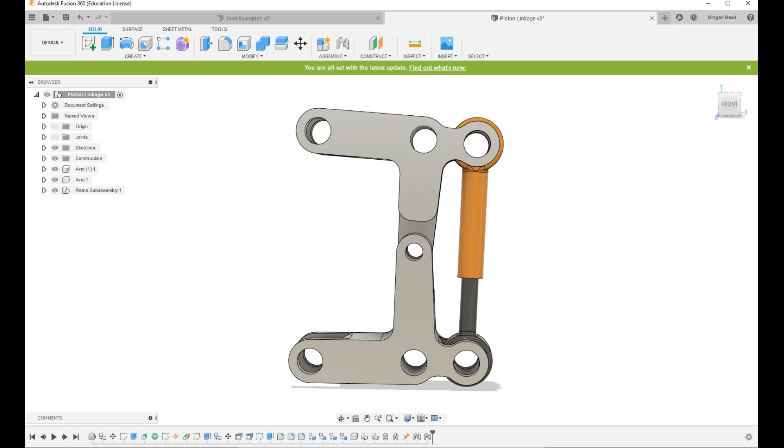Okay, today we are going to simply learn about a feature that Fusion has called joints. Here's what joints do in a nutshell. So after you get something modeled, you can actually add joints to it to make it move like it would in real life. So you can add constraints to those joints so it doesn't go too far. I think there's like 6 different kinds of joints. So this is eventually what you're going to work up to, but let's take a look at what these joints

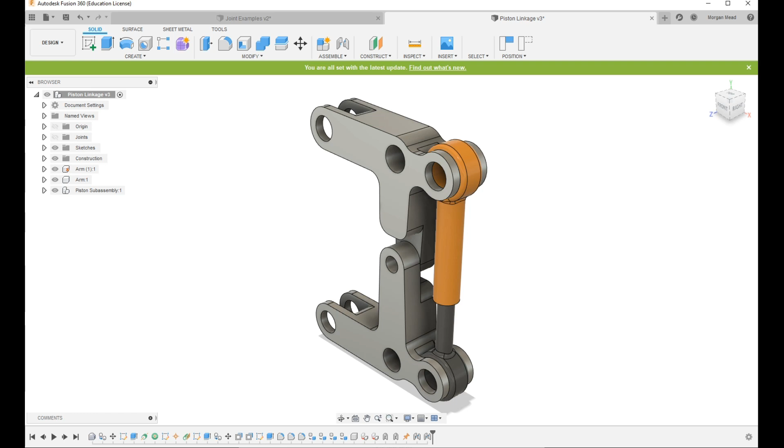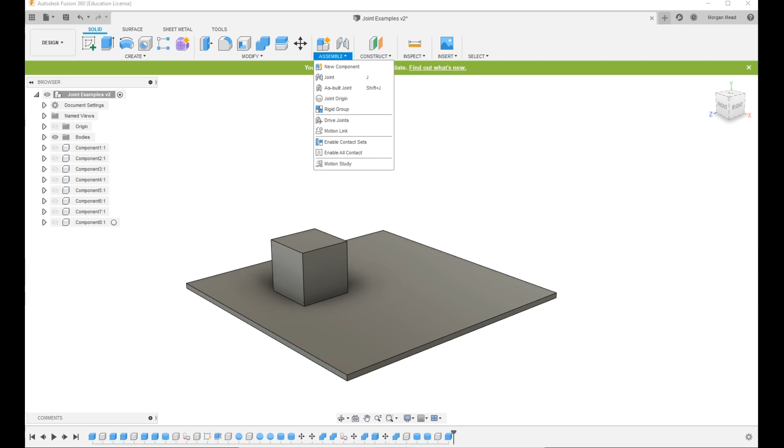are real quick. All right, so the joints are up in this menu under assemble and then joint. There's actually 2 kinds that you can do. You can do joint or as built joint. Right now we're just going to look at joint. The big difference is as built means that the pieces are already in place where they go. Joint will actually move them into place and then put a joint in between them.

So let's go ahead and go to joint, and it's going to ask you for 2 components to join together. Right now I have 2 bodies and they're in the same component. So if I try to select them, it's only going to select them together. So I wanted to make you aware of this first. This is the reason that we got you in the habit of making new components for the Fusion Cubes project, because everything has to be in new components in order to do joints and really anything else in Fusion. It just likes you to have different parts in different components.

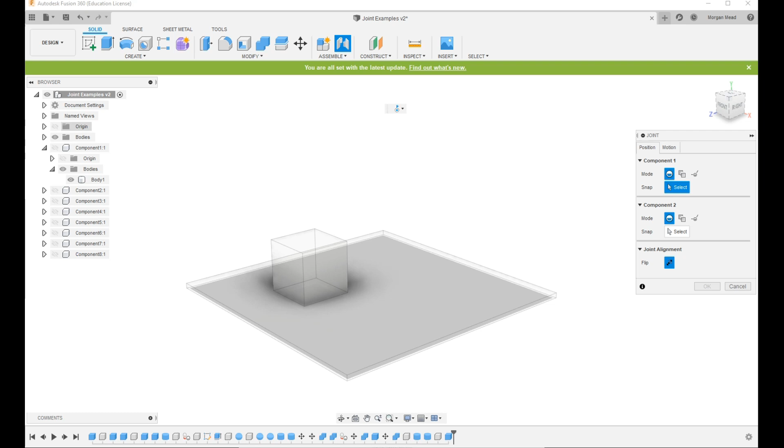So see, each component has its own little folder full of bodies. But if I have the bodies next to each other in the same bodies folder, that means they're in the same component, and I can't really do much with that. So I'm going to go ahead and hide that cube because that was just my example. And let's show this one. So now I can take the main component up here, which only has my floor in it. And that's going to be my first thing. Let's see if it lets me. Let's go back into this. Yeah, it's not going to let me do that one either. So I'll just show 2 components then.

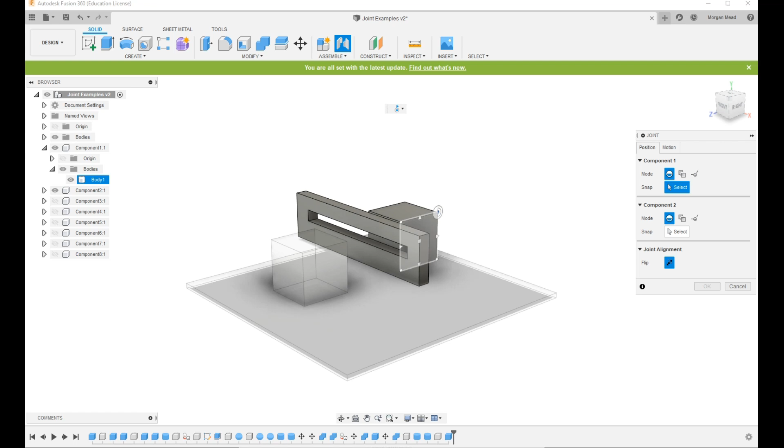So here's component 1. It's going to ask me not only to select the component, but also to select a pivot point or a snap point where the joint is going to kind of land. When we do the first kind, which is rigid, it really doesn't matter where that pivot goes or that joint origin. So I'll just show you what that looks like. That little circle with the half moon thing, that's the joint origin. It's asking you to place one of those whenever you click.

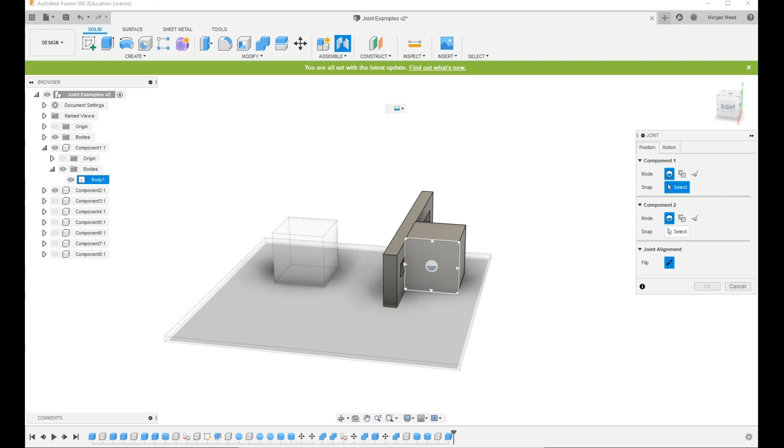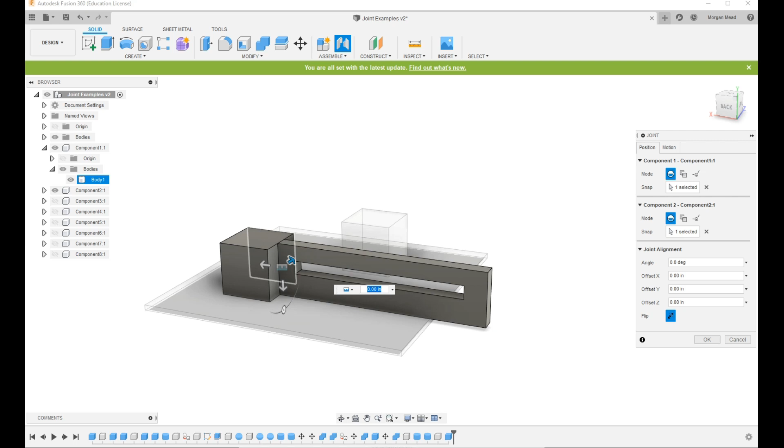So I'm just going to click here, and then I'm going to click on my second component. See, it's got this one selected now. So now it moved on to component 2. So it's asking, what am I joining that thing to with a joint? And I'm just going to click on that one. And it's going to take those 2 joint origins and smash them together. So I picked the center of that face on the box and the center of this face on this weird shape. And it moved them because I picked joint. If I would have picked as built joint, it would have kept them in place.

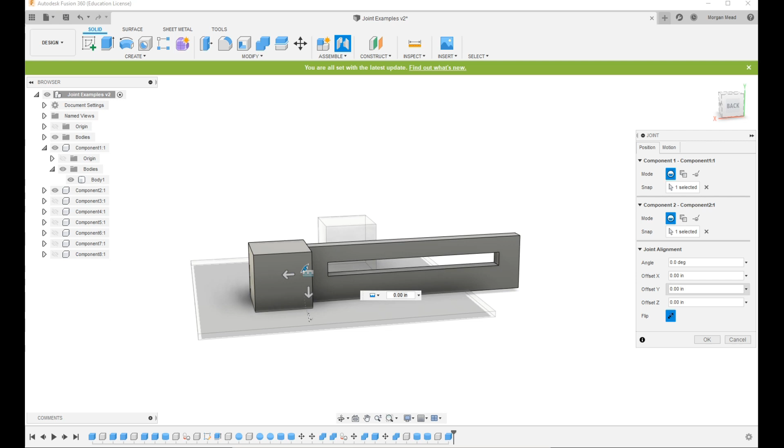So I would have been expected to have this already moved into this spot if that's where I actually wanted it. Okay, then I have options of flipping it. So if I flip this, it's actually going to put the cube inside of this thing, which is undesirable. And I can offset it or rotate things, kind of add some fine tuning to that. I'm just going to hit OK. So now let's get this guy out of here again. Now if I try to move this box, these 2 move together because they are joined with a rigid joint. That's basically like gluing the pieces together.

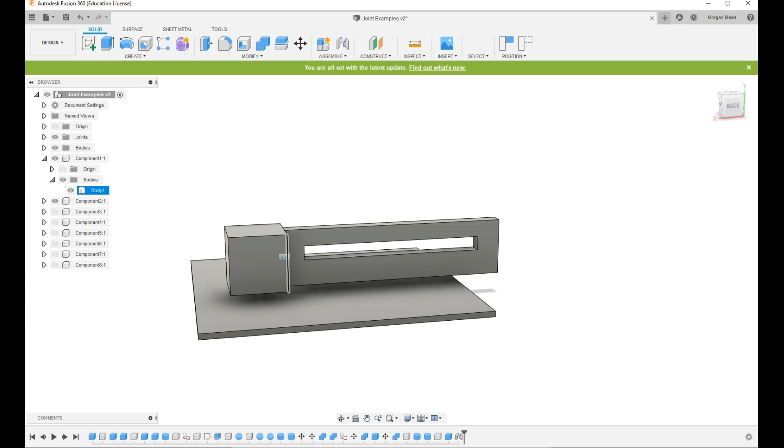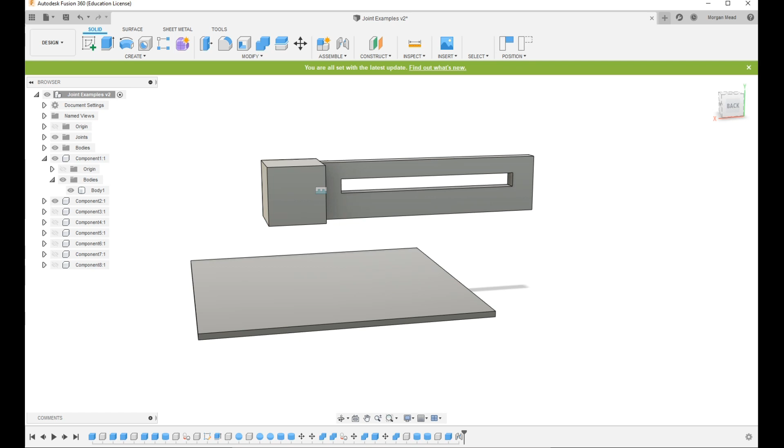Now you'll notice too that whenever I move something, this little icon appears up here. It's asking me, do I want to capture the position or do I want to revert? If I capture the position, then my boxes or my objects, whatever I have, are going to stay put right here. And then this icon is going to disappear. If I hit the other button, it's actually going to go back to where it used to be.

So the reason they have this is because you can sit here and test. You can test the movements of things and say, oh yeah, this is moving the way I want it to. And then you can just revert it back to kind of the standard position of your object. So like that piston thing that I just showed you a minute ago in the other project, I would test the movement to see if everything is working, and then I would revert it back to the position, because I don't want things in really weird positions when I'm modeling.

Okay, so that's a rigid joint. Notice too, whenever I put a joint like that, I can select it right there by clicking on it. I can also go down here and select it. Either way, I can go to edit joint and change a few things if I need to.

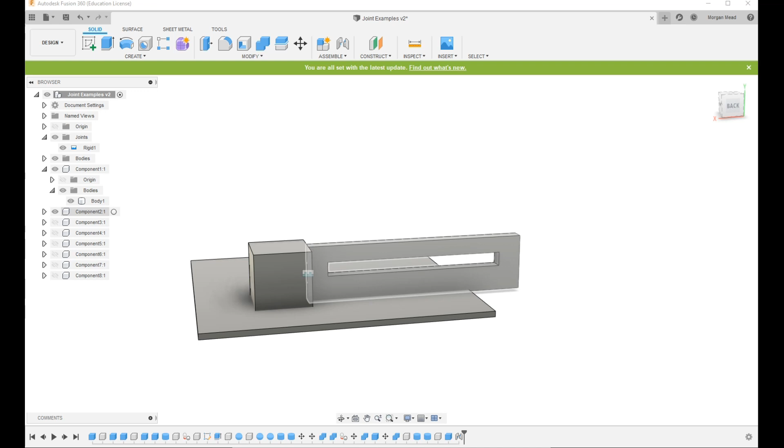It also appears right here in your brand new joints folder. So as long as I have the top component active like this, my joints folder is going to go up here. If I had a different component active, the joints folder would go inside that component. Let's keep all of our joints up here. So if I wanted to get rid of that now, I can just right click and delete it. And of course, everything goes back to the way it used to be.

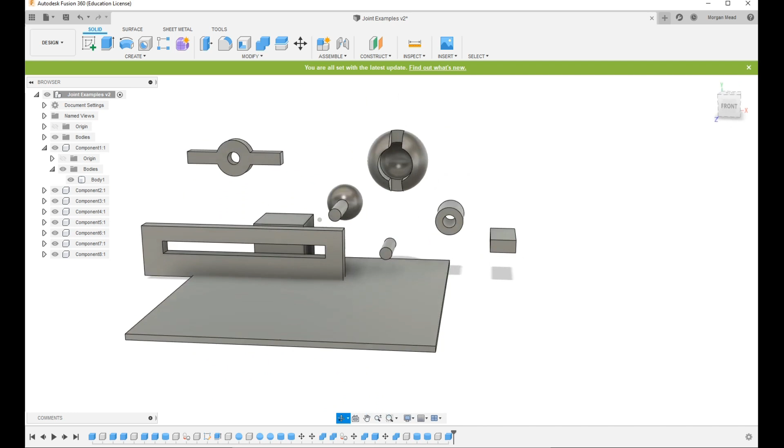Okay, so let's show a few things here. I modeled out some objects just to show you what a couple of these things do. Let's move this little guy out the way. You go right there now. Okay. So let's see what these different joints are. So I'm going to go to joint, and I get this little drop down that appears kind of in the middle of nowhere.

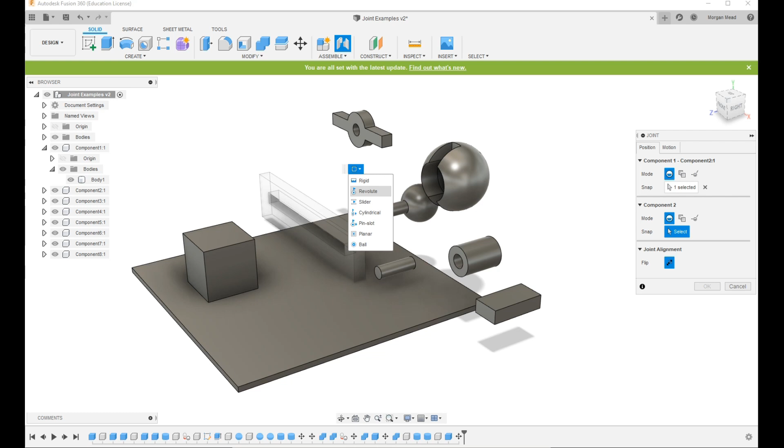These options right here just let you pick the two components and pick the joint placement. But this is how you actually pick what type of joint you want. I'm going to go through each of these. So I just did rigid. Let's do Revolute. So Revolute is just basically a spinning joint. So like this one right here is what I've got for Revolute.

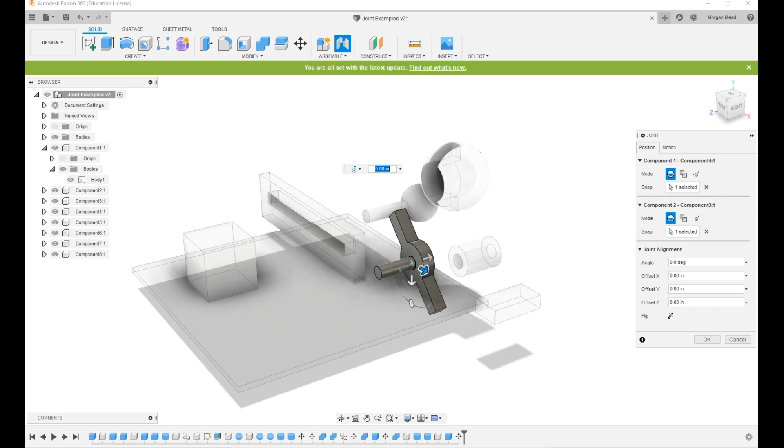Okay, so the Revolute one, I'm going to pick this one right here. And I'm going to pick that one right there. And it's going to show you a preview of what this looks like if it's working. And sometimes that preview is like really weird. Sometimes it'll be at a weird angle or something like that. Usually that's okay. Usually you can kind of tweak things and fix it. But let's go ahead and hit OK and see what this does.

So now if I just kind of grab this object anywhere and tug on it, it's supposed to turn around this object. And I think the reason it's not working right now is because we need to tell this object to stay put. So the problem is right now, if I'm grabbing this, it's just kind of moving everything, taking everything with it. So let's go to this object and tell this one it's not allowed to move.

So if we right click on this component, what we're looking for is ground, which is right here, the second option down. If we choose ground, you're going to see a little push pin right there. And that's telling this cylinder, when I'm grabbing this and trying to turn it, this one can't move. So let's see what happens. Whee! That's fun. That's fun. I could do this all day. Okay, so revert position.

Okay, so at this point I need to tell you my cat is coming in here to see what's going on, and she's very asthmatic. Let's see if you can hear her breathing. Watch this. Ugh, come here. Can you hear my cat? Oh yeah, sure. Now she's being quiet. So anyway, if you hear something that sounds like an old lady that can't breathe, that's my old lady cat.

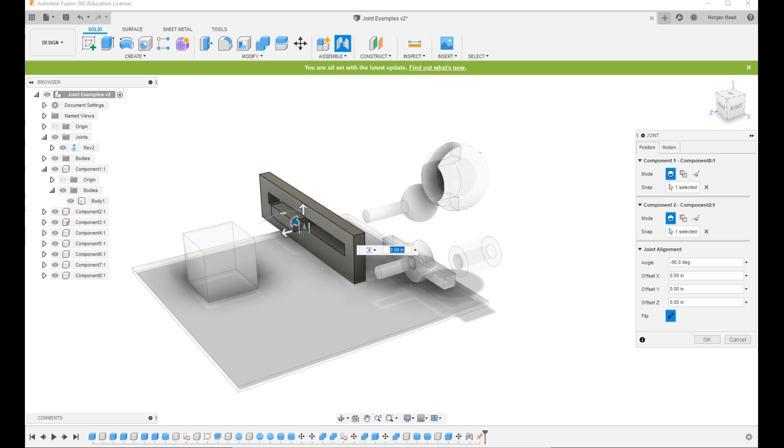And then I'm going to pick, same thing, I'm going to hold in control right here, and I'm going to pick that little triangle right there. Let's see what happens now. Okay, so the little square is at least laying in there where it fits now. I'm going to rotate that.

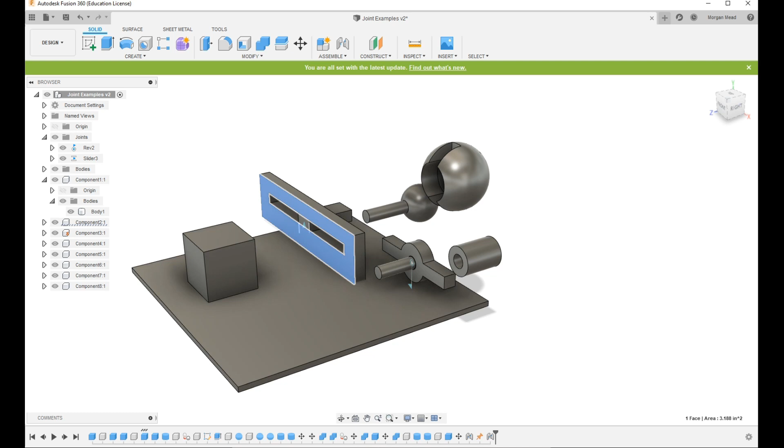So this is the way I wanted it, but I don't want it to slide up and down like it showed. And I do want it flipped like that. So let's just see what happens. See this little slider right here? I think it's pointing that direction there. So let's go to this one. That's this guy right here. I like to click on things over here to see what gets underlined over here. That's how I find things.

So then I'm going to right click and go to ground. And let's see what happens. Yeah, that's sliding the wrong direction. That's cockamamie, I tell you. Okay, so let's go back over to this joint right here and edit that joint. That's only the limits. Let's go down here and edit the joint. And I want this little guy to be 90 degrees, I think.

I just hit the microphone. Sorry about that.

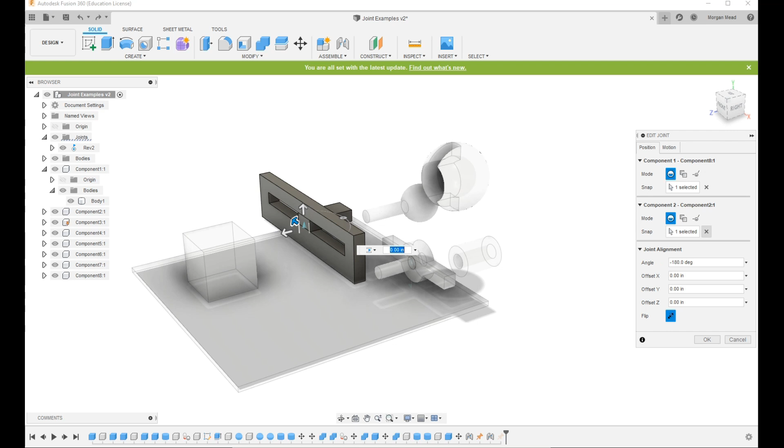Well, that didn't do what I wanted it to do. So it did that face and that face. Let's try something else. Let's go back here to where, actually, let's just go back. Okay, I'm stepping back in time. This little back button down here steps you back in time. So that joint and that grounding never happened.

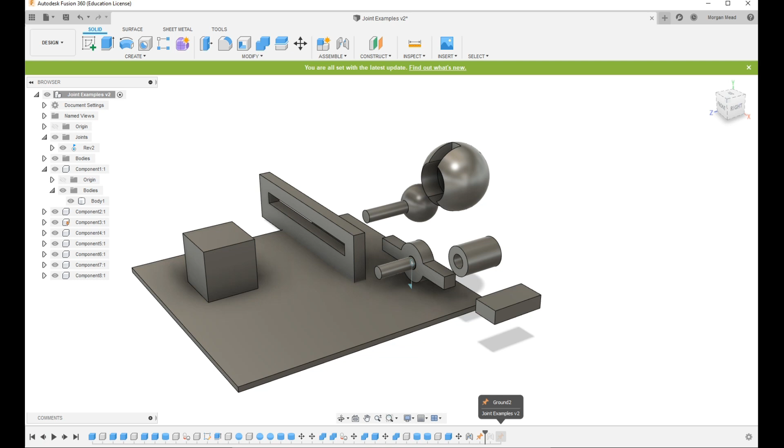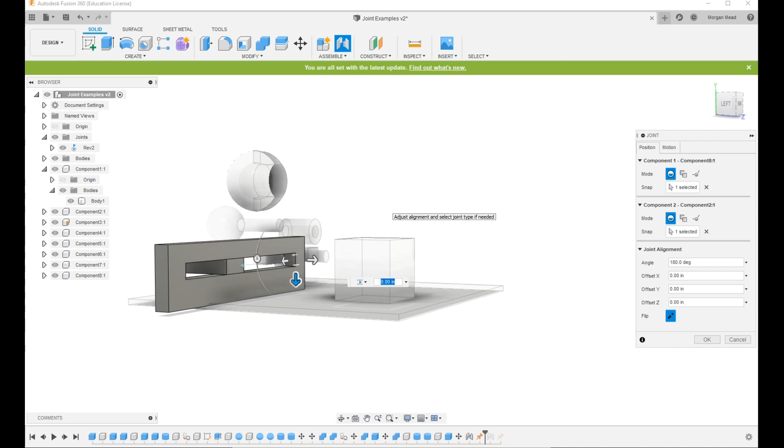Let's go back up here. So I picked the top face here and the other face here. Let's try a side face. See if that gives us better results. So if I pick that one and then I go over here and I pick where this one lines up. So that's supposed to be like right there. Now it's sliding in the right direction. Okay. So sometimes you just got to kind of tell Fusion explicitly what you want to do.

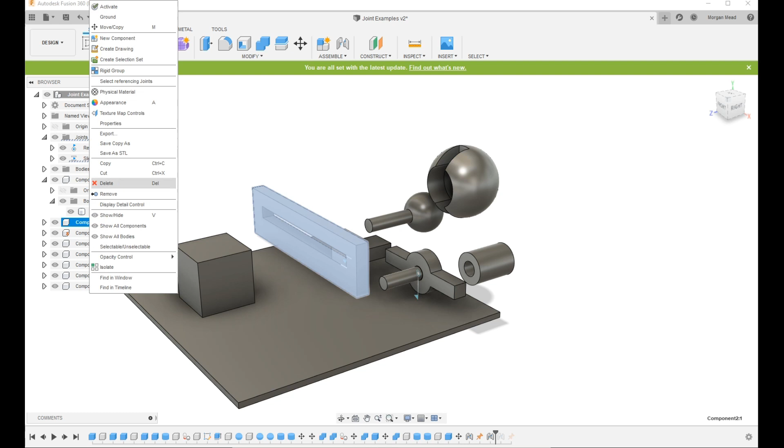All right, I'm going to ground this one. So I click on it to see what highlights over here, because I did not name my things. I wanted you to see that they were components. So I'm going to right click and go to ground. Now if I take this little rectangle and I drag it, it's going to slide inside of that slot, which is really cool. That's what we want. Okay, so that is the slider joint.

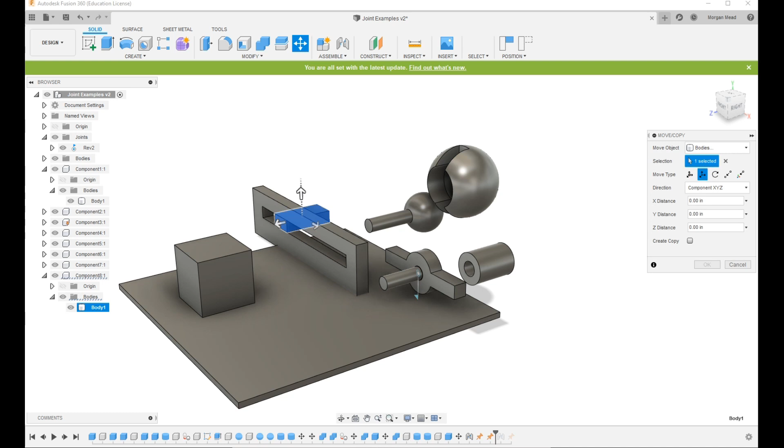I'm actually going to get rid of that because the next joint that I want to show you is a little bit similar. Made specifically for cylinders. So let's get this little guy and say outskis. Okay. And we'll capture all the positions. All right, I want to take this guy that I have grounded previously and unground him. I do want to keep this guy grounded.

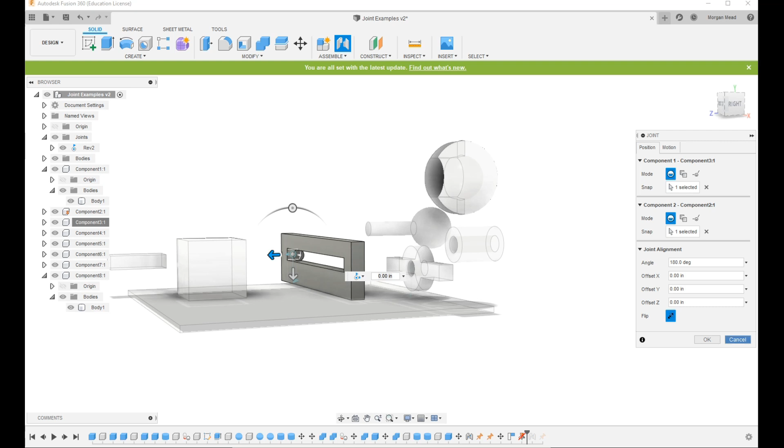And let's take this one and put it into this slot right here and do a different kind of joint. Look at that. We can do between two faces. This did not used to be there. Okay, let's do the front face, and we'll do, I don't know, whatever. Why are you not? Why? So it looks like you would eventually, there we go. So that's the right thing.

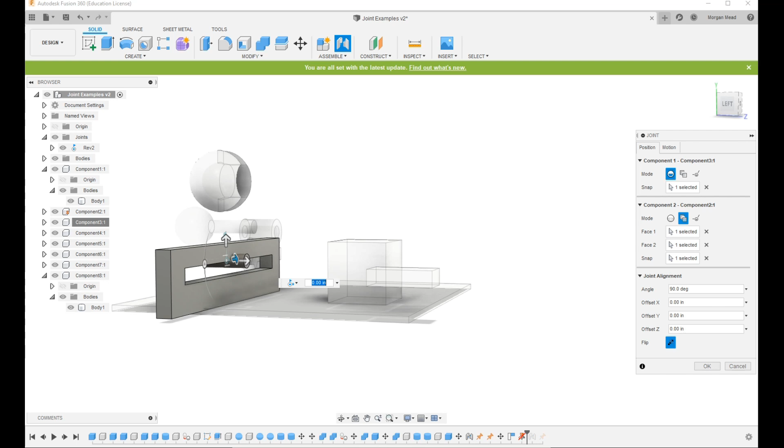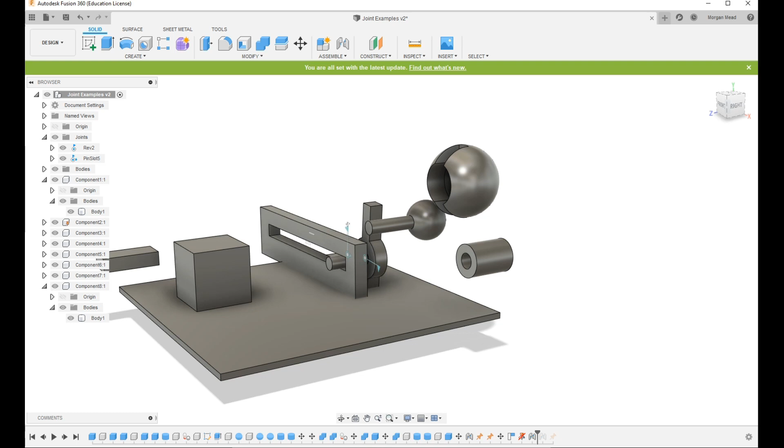But it would expect you to have like a pivot point floating out there. So you'd have to do some construction and find a way to get a point through the center of something to place out there. But we can manually move this down now and hit OK. So after a lot of hard work there, what we have is this little pin that slides down here, but also this little guy can rotate. So if you can see that, he's turning as well as the thing going through there.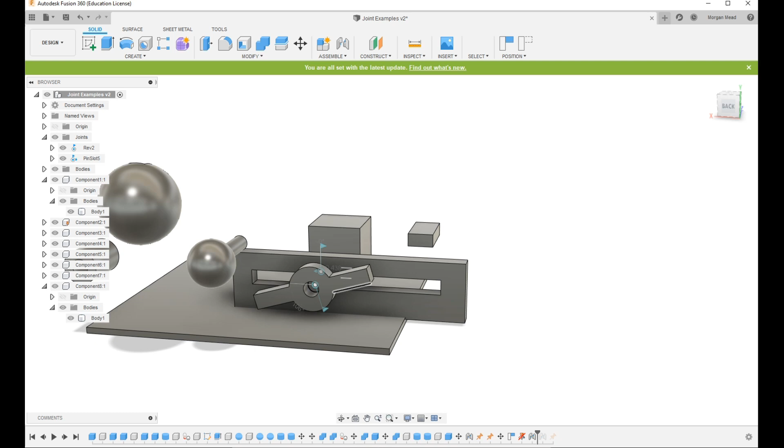Now, one thing that you are noticing is we can take these things way out of where they're supposed to go. That's where joint limits come into play later. You know what, I'll show you a joint limit right now. So up here where the joint is, you get this little orange icon. It says edit joint limits. Let's take a look. This one has two motions on it. It rotates this part, but it also slides down the slot. That's what a pin slot is.

So I just want to limit the sliding, and I'm going to do a minimum and a maximum. So the minimum that I want to do is, let's say right there. So I'm going to drag that little blue arrow over there with the minimum checked. So that's about as far as I want to go on that side. The maximum that I want to do looks like 1.4 that way and a negative on the other side. So I'm going to do that.

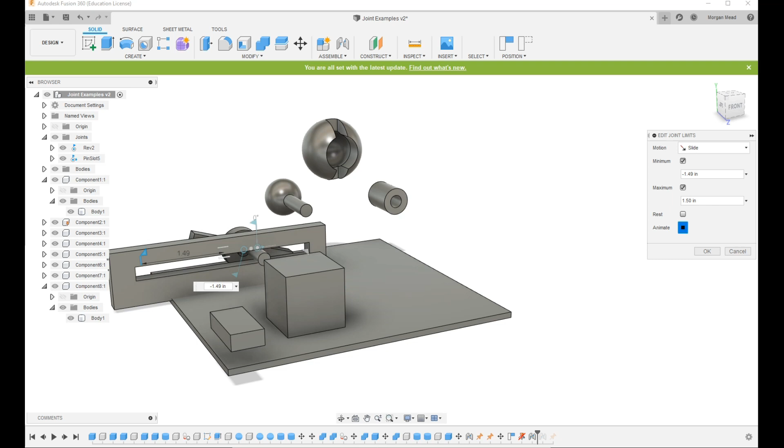And if I hit the animate button, it's going to show me what that looks like. So now it can't go out of that slot, which is really cool. Hit OK. So now if I drag this little guy around, it should give me a more believable motion.

So that's joint limits. You're going to be using joint limits in a minute too. Okay, that was long and arduous and crazy, and I feel like crying now, but we have more to do, so let's keep chugging.

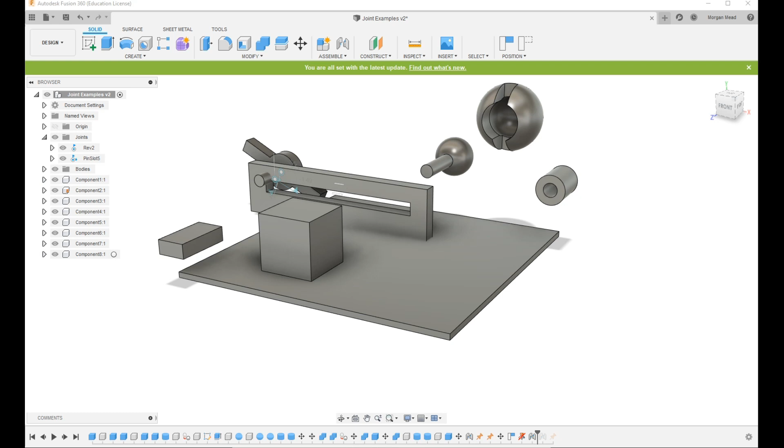Revert those positions. That'll throw it back in the center there. Let's do another joint. So I'm going to take this guy, and we did a revolute, we did a slider, we did a pin slot. Let's do cylindrical. Cylindrical is like a piston in a car, or your little screen door has that little piston at the top to kind of let it close slowly.

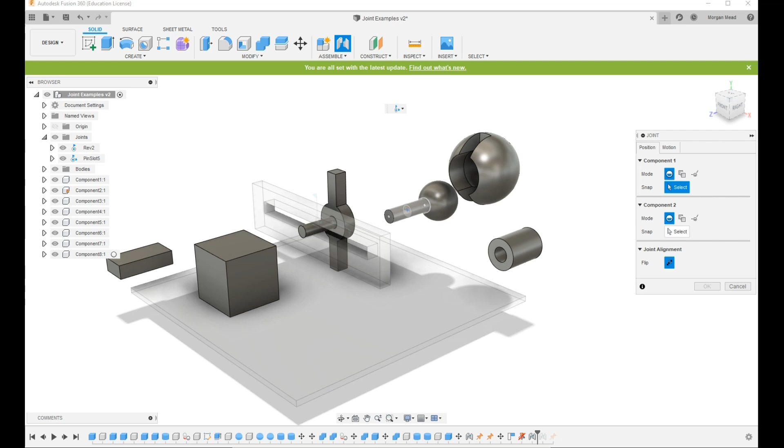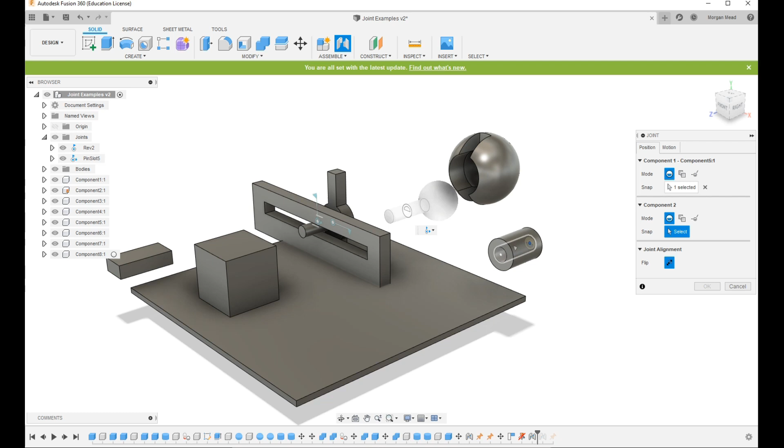So let's do that. So piston, I'm just going to pick the middle one right there, and then I need the middle of the inside, the little hole in there. So again, I have to hit Control to keep my selection. Now I can pick which one I want, and I want the center to line up with the center, or I could start it at the beginning. It doesn't really matter. But it's going to show you that that is the motion. Again, I don't want it to move up and down like that because that's weird and unnatural.

But if we hit OK, now if I take this, again, this part right here has to be grounded. So let's find it and go over to ground. Yes, capture that position. And now if I move that, it's like a little piston movement. Okay, so I can limit that again so it doesn't pull all the way out or push all the way through like this. Not good to have bodies intersecting like that because that can't happen in real life.

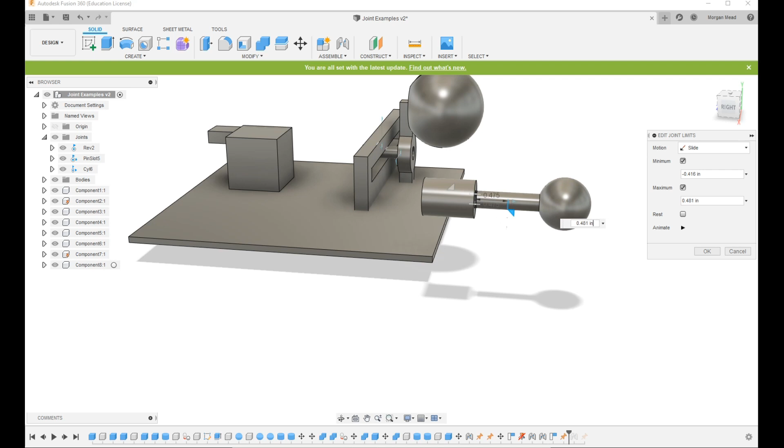So let's go ahead and edit those limits. Might as well show you again. So I don't care about the rotation. I just want to limit the sliding. Let's do a minimum, and you got to pull on that little blue arrow. So minimum of that, then a maximum. The second blue arrow is always the tricky one. I don't want it to go all the way out there, so we'll do that. And animate. Perfect. Hit OK. So now that moves naturally, just like an actual piston would.

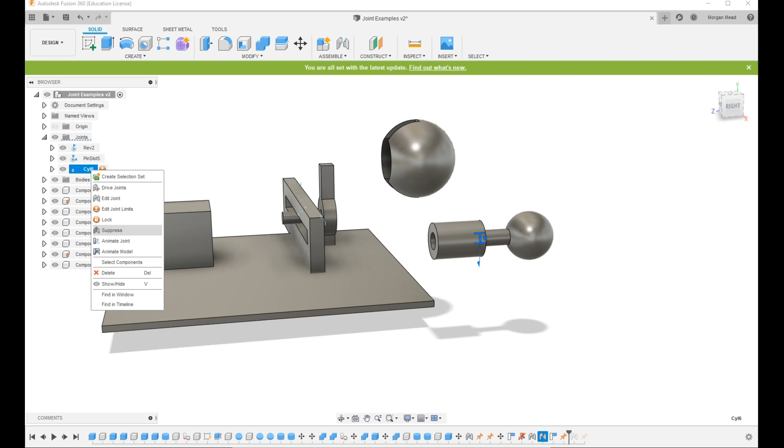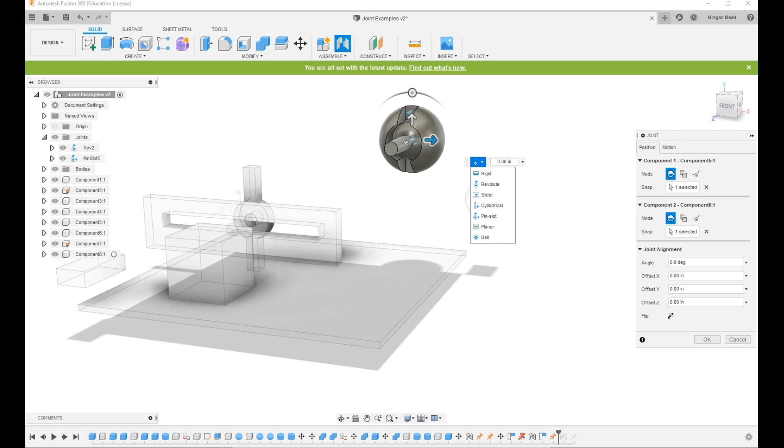So that's cool. I'm actually going to get rid of that joint completely because I want to show you a much cooler joint, a ball joint. That's why I made this thingy right here. Joint. We're going to pick this guy, center of the sphere, and I'm going to go up here and do center of the inside sphere. We're going to go to ball joint. A ball joint is just like a shoulder socket. So I'm going to hit OK. I got to ground this. You guessed it. Ground. And I'm going to take this and whee, look at that.

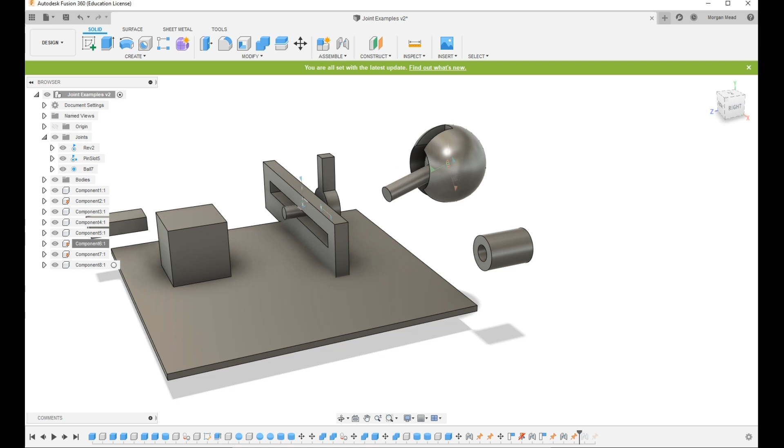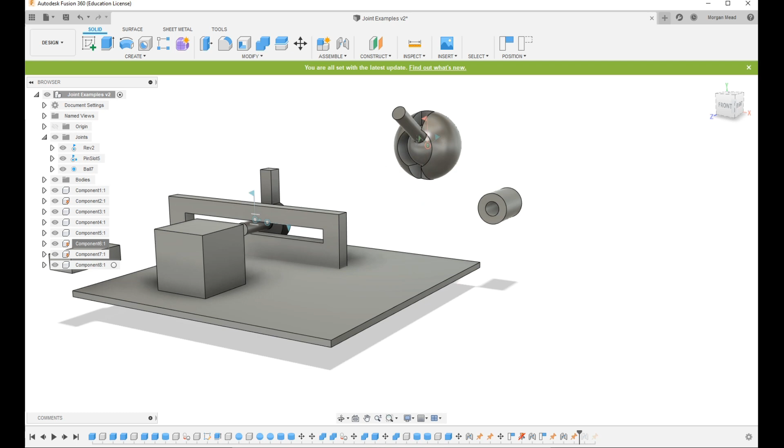So if this and this were separate components, if they weren't one joined body, I could actually make this one some other kind of joint. I'm not sure. I'd have to experiment to see what we could do with keeping that in there like that. Let's do one more. I think there's one more left. We did do that. So planar is the only one left.

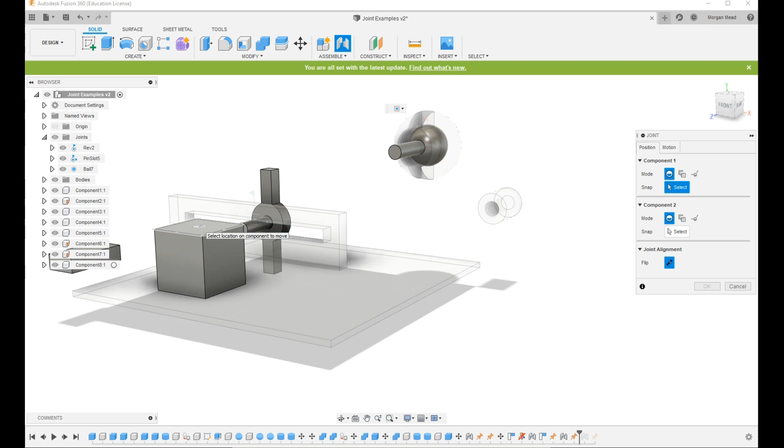So planar is like scooting a couch around the floor. So I'm gonna pick this guy. You know what? I'm gonna pick the top face just to show you one more time what picking the wrong face does. So I'm gonna pick the top face of that, the bottom of that one, and whee! Okay. So you saw how the cube flipped all the way around just to get there. That's just weird. So if I take this, now I can scoot it around like that.

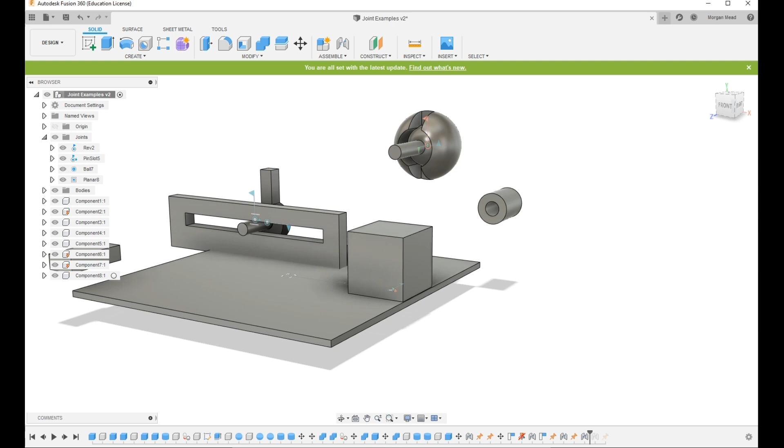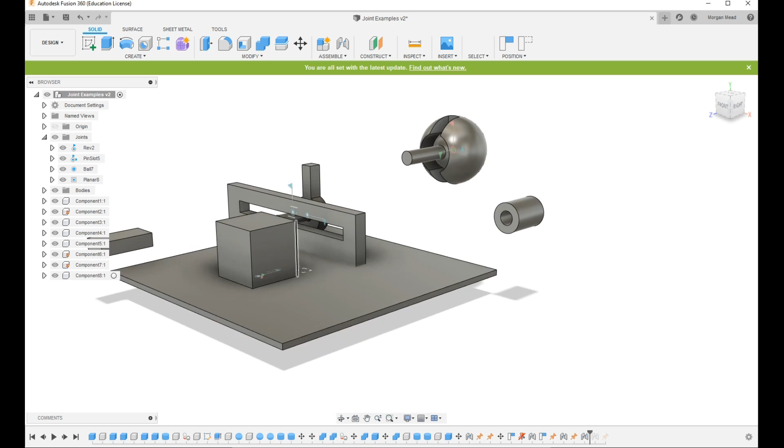I know, it looks just like going over here and hitting move and dragging it around. But this is dynamic, meaning if all these things were connected in different ways, this one would freely move this way, but not up and down. So it is a different thing. This is not to get things into position for modeling. This is to see how things interact with solid objects.

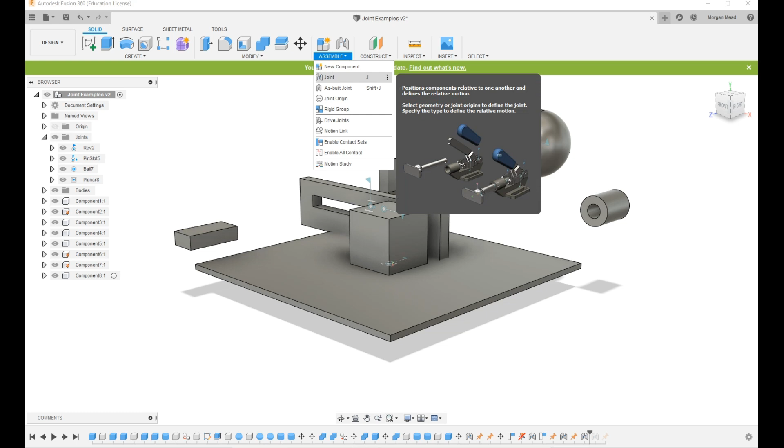Okay, hopefully all of that makes sense to you. Just remember to hit Control to pick the right snapping points for your joints. And remember to do joint instead of as built joint. And remember that if you mess it up, you can just right click here and delete a joint, and they can all just go bye-bye. Remember to right click and ground the object that you need to ground so it doesn't move. And that's pretty much it for joints.